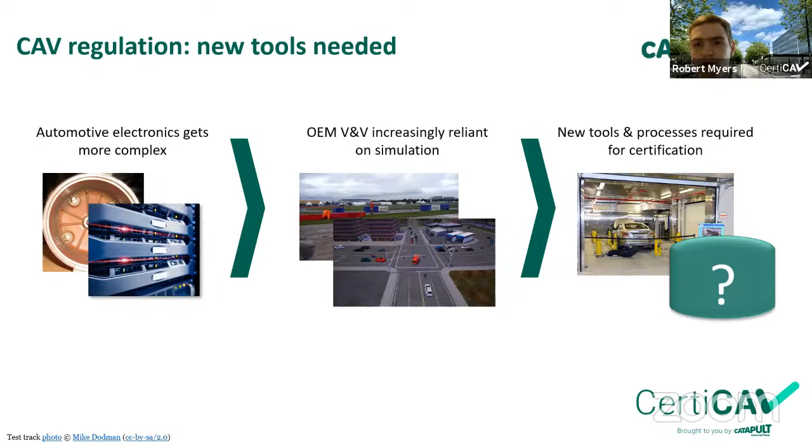And it raises the question, if we've got complex systems which are perhaps hard to verify completely at all, but certainly in physical tests, what are the new tools and processes which regulators are going to need? This is the sort of question we started on, particularly with respect to the tool side of things, when we were thinking about the MUSICC project.

So what I'd like to do is briefly introduce the MUSICC project, what it does and what the outputs were. Talk about the idea that safety is partly a compatibility problem when it comes to driving. And then, as was mentioned a minute ago, talk you through what we've done so far and the questions still to be answered on safety criteria.

One of them is the idea that a regulator probably wants to have some sort of a role in defining and specifying scenarios. They might want to curate a set of scenarios and require an OEM to test against them, for example. And that implies a need for some sort of tool to assist them with this process, which was exactly what MUSICC set out to do.

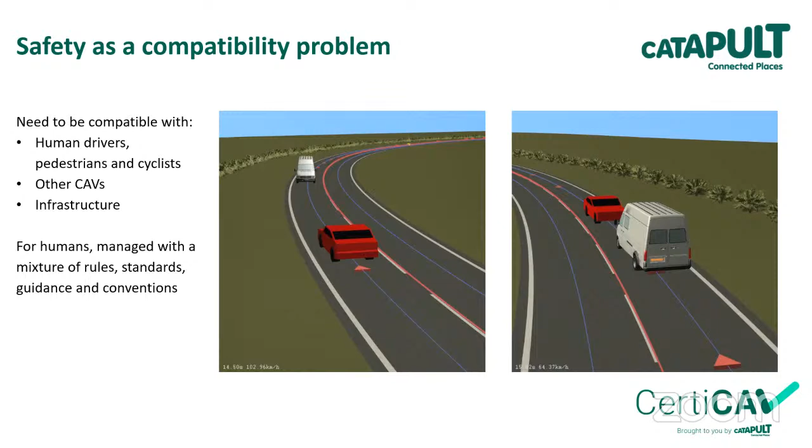That works great for robots if you can define such a set of rules, but there's also a need to handle things like human error and the interactions with other road users. So, as I say, I won't dwell on this now, but our early thoughts were that some sort of mixture of rules and more generic, more flexible measures would be needed to handle situations which came up.

When we proposed these to our advisory group, the feedback was helpful and interesting. I think it's fair to say that the majority of people agreed we were on the right sort of lines, but there were a lot of interesting questions raised, particularly about how you make these measurable and applicable. And that question of making these measurable and useful effectively is one which we've been looking at over the last few weeks. And I think that brings me to the point where it's time to hand over to Tom Webster, who'll explain a little bit more about what we've been doing in that area.

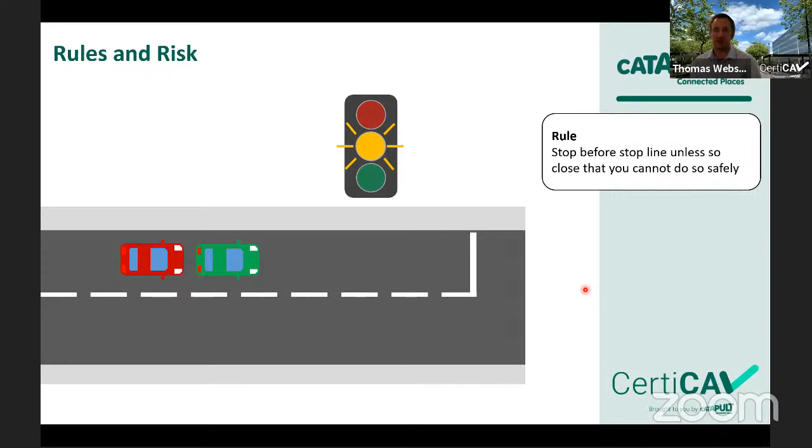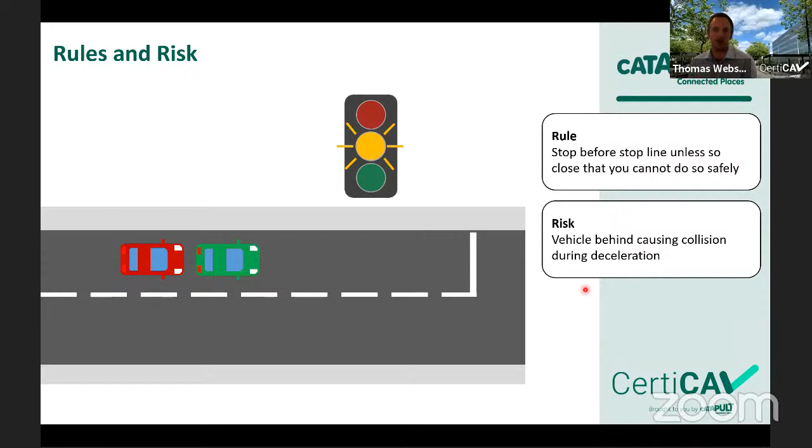So what if there's someone who's accelerating up behind you very close, doesn't appear to have any intention of slowing down? This introduces the risk that if you do start to decelerate for that stop line, you could be involved in a collision. So that changes what's reasonable in terms of interpretation of the rules. So these are the kind of challenges that there always are in relation to evaluating what's reasonable, what's safe.

Things like, what is a reasonable interpretation of traffic rules? Because they quite often have kind of what-ifs. What is a reasonable balance between following a rule because that's what you're supposed to do and risk minimization? And there is also the kind of tricky compromise of there is always a bit of a risk appetite. People will make decisions to erode safety to a small extent if it's going to have a big impact in terms of their journey or movement of traffic and so forth.

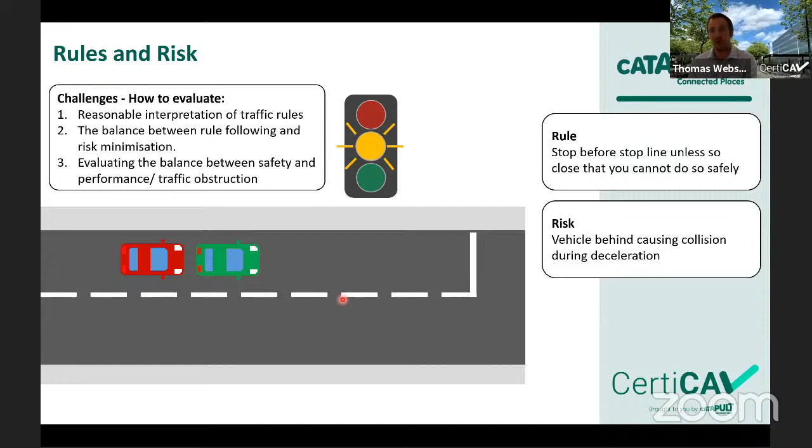So in relation to this rules and risk landscape, we had the idea of, well, you can actually map and visualize this. So if you create an axis where on your x-axis, the positive side refers to common specifications, and on the left side is proprietary on the negative. The reason this is all in grey is that that is not something that's viewed from the outside. And then on the y-axis, if your positive is following rules, and the negative is based on risk, then you can start to map out how driving is executed on that basis.

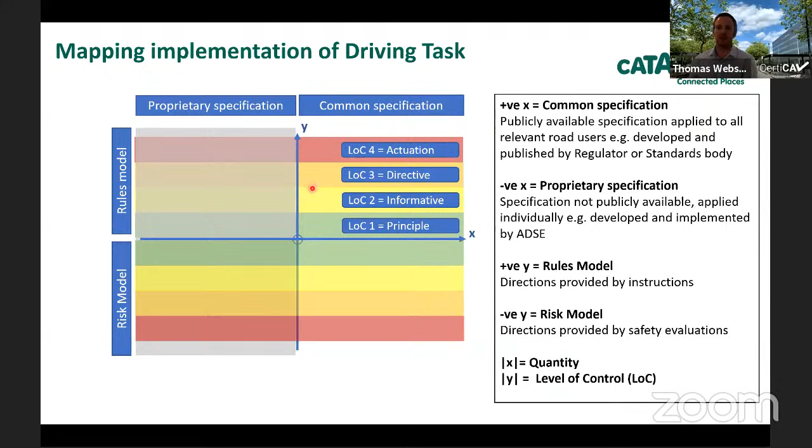And something else we can do here: if you make the magnitude of the x-axis a quantity in terms of number of instructions, you could make the y-axis level of control. So we put four arbitrary values for that. You've got principles going up through informative, directive, and actuation at the top. So in the act of driving, you need to be doing something at the top to actually actuate driving instructions. But then there's some substance below that that's helping to inform and set the structure, influencing how those actuations happen.

So subjectively, human driving might look a bit like this. There's all the fabric of the road traffic rules, which is, of course, common specification, it's public, and it's largely based on rules. But in the highway code, it is setting some high-level specification on how you actually go about managing risk. These do have some detailed instructions, but they usually have caveats, so unless it is seen by the driver as safe to do so.

So in the actual act of driving, drivers are individually determining what are reasonable decisions through real-time risk assessments as they're driving. So they're basing this on some common principles that are defined, but it's largely a self-learnt process. Something else that should be noted is that there are sort of proprietary and unofficial social conventions in place in the real world as well.

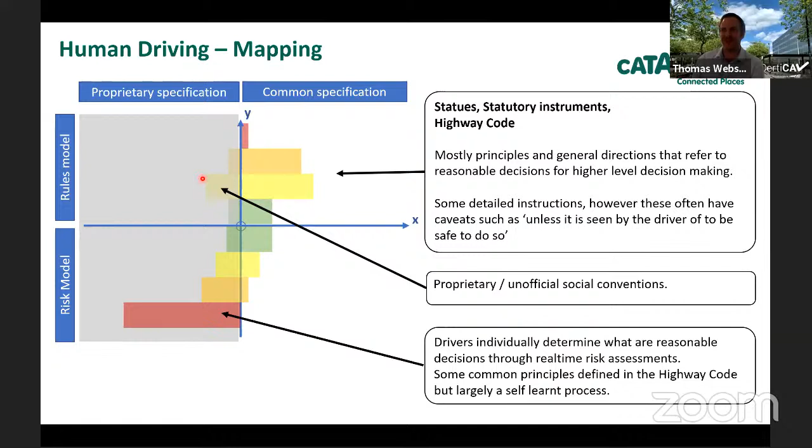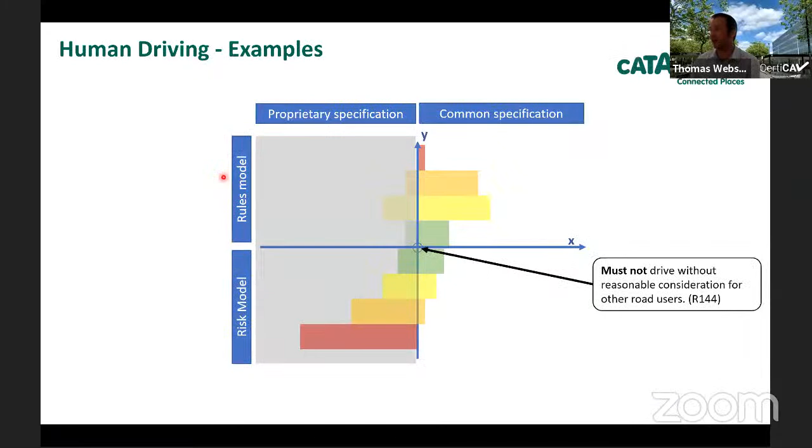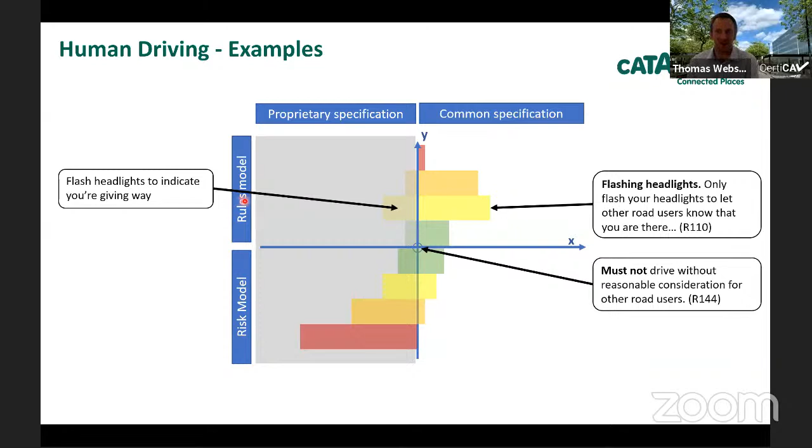So to give some examples, Rule 144, an excerpt from that is must not drive without reasonable consideration for other road users. That's a principle. Going up the scale, only flash your headlights to let other road users know that you are there. If you then go on the other side and look at proprietary, it's generally understood you flash your headlights to indicate you're giving way, which kind of conflicts with that. Going up to a more directive rule, you must obey all traffic light signals.

There's an example in the highway code informing how you go about risk. There's things on adapting your driving. But in reality, when people are actually executing their driving, they're making all these real-time decisions, and these are actually governed by this actuation, low-level risk modeling that's going on inside someone's head and that they've developed and learned over time.

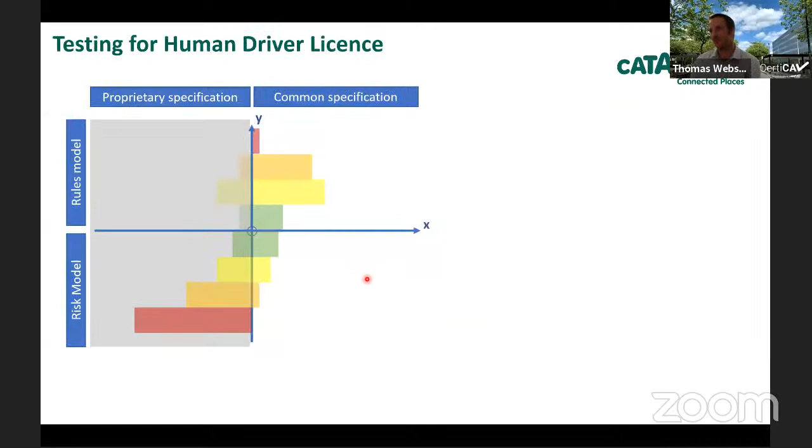So how does this then translate in terms of testing? When a human driver is tested, their comprehension of the highway code is spot checked with a theory test and so forth. And then in the driving test and the hazard perception test, the ability to execute their risk assessments is assessed. One observation: do humans have an inbuilt defeat device like VW and Mercedes? Because they're probably not going to perform the same way during tests that they do as soon as they pass their test.

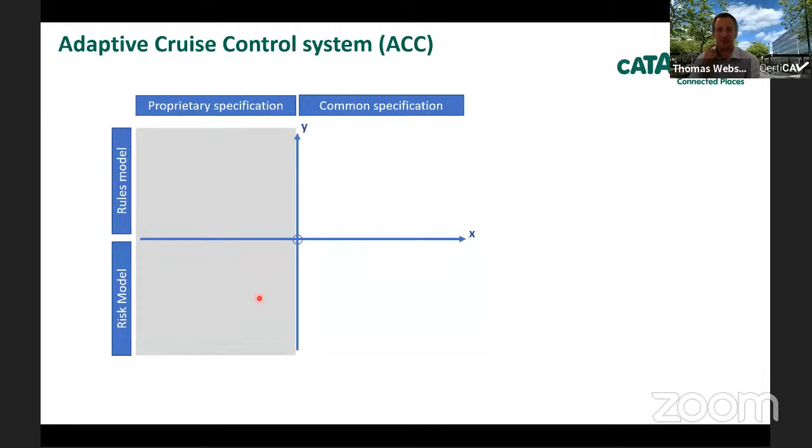This is a very limited sample of overall driving. This works because humans have a kind of common specification, and it's been proven over time that this works. And it's generally accepted that as a human, you continue to develop and learn after passing the test. But you can't take this and then apply it to an automated system, where we do not know the history, the common specification that applies to all, and so on. So if we take a simple automated system, and perhaps I should have used lane keep assist, but adaptive cruise control, quite simple. There's a specification, nice and simple.

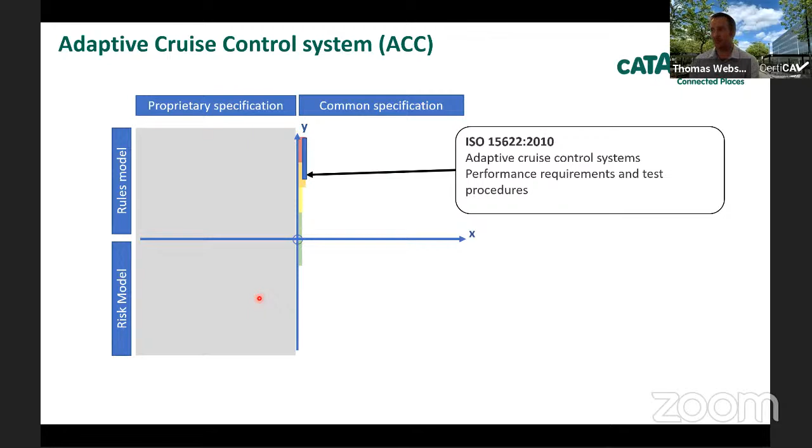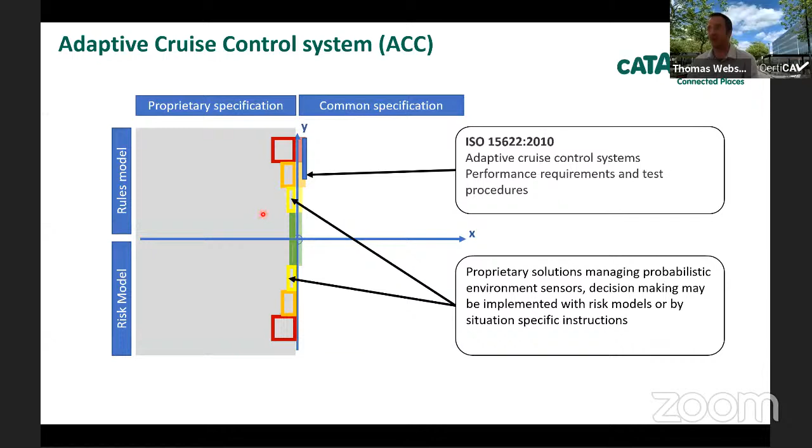But behind that specification, in terms of how that's been implemented, there is a proprietary solution. And that proprietary solution could be implemented based on risk modeling, or it could be implemented based on fine-grained specific instructions, and most likely a combination of both. And you don't know which or the other. All that's happening with adaptive cruise control is that it's passing the test.

Growing that up to high-level automated driving systems, there are proposals in UNECE setting principles there. These then reference road traffic regulations, so that references the existing fabric there. And again, when it's actually implemented, those proprietary systems could involve either risk models or rules models.

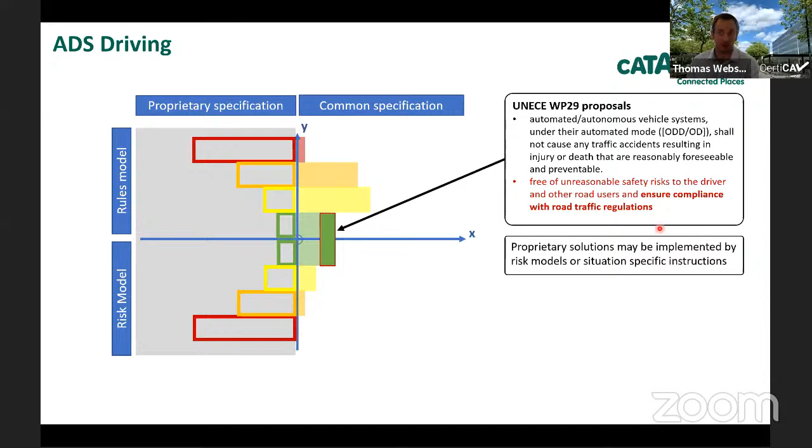So the kind of challenges involved here are that, one thing just relating to what's in red, saying to ensure compliance with road traffic regulations. You know, it's a valid principle, but some care does need to be taken that complying with driving rules doesn't forbid manoeuvring to prevent harm.

The existing traffic regulations are referenced, but those have been developed over time as a suitable tool for managing humans, and aren't necessarily applicable for automated driving systems. And they don't facilitate directly making pass-fail decisions at a scenario level.

So in terms of what options are there for generating evidence for informing evaluation decisions for ADS, the principles are there and they can be applied, but they have limited fidelity or they're not objective. So if it's an objective principle, such as don't cause a collision, then the fidelity is limited, because if you're just looking at causation of collisions, you need to look at a very large number of scenarios to get a statistically valid result.

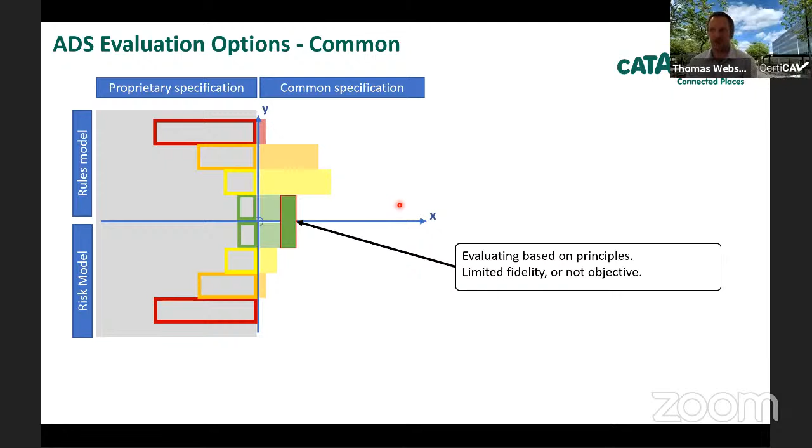Whereas if it's a more subjective principle, such as drive with due care and consideration, then your evaluation against that is somewhat subjective. It is possible to evaluate against the definitive directive road traffic rules. This does require some digitalization, so to speak, of those road traffic rules. And this may be of some use. However, because those rules relate back to reasonableness, there are limitations on what you can achieve there.

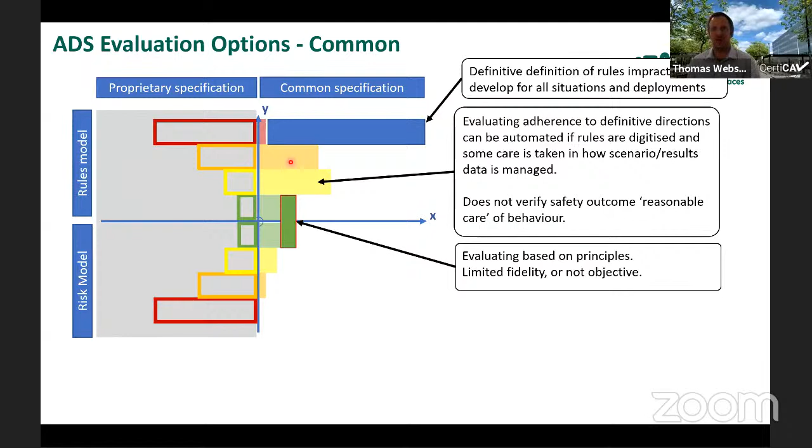If you want to grow that up and make those very fine-grained decisions, you would need to be making what some people might refer to as a full digital highway code, and really to create something that's definitive that you can apply to all deployments is, we suggest, impractical.

Likewise, you could evaluate based on risk by developing common risk models. But again, to do these at a lower level may be possible, but to do it at a high level, to make those fine-grained decisions, is very challenging.

One other observation here is that detailed evaluation requires detailed data. And this may quite often come down to things relating to driving, such as interactions between humans, interpreting poses and gestures. And this is something that's impractical to standardize, because different ADS are going to detect different things, use different perceptions to inform their decisions. And so there's a problem in standardizing that.

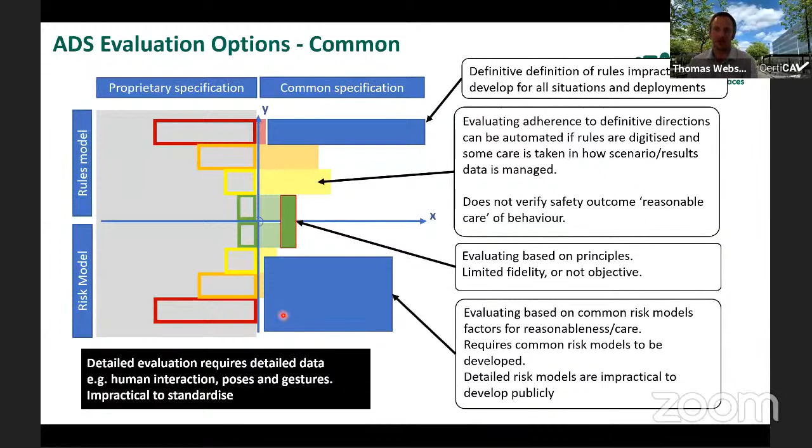Looking at the other side, on the proprietary, it's possible to evaluate based on principles. So this is similar to the common principles. When it then comes to making evaluations based on proprietary specifications, you get the challenge with IP. This is something which an ADS developer has put a tremendous amount of their value into. So sharing that raises sensitivities.

It allows you to make evaluation decisions based on scenarios, based on their own specifications. But what it doesn't help you do is actually come up with an overall validation of safety, because you've only checked that, okay, yes, it performs as per their specification, but does their specification actually provide an overall statistically safe system?

And another challenge you have is that there would be use in this in terms of you can find holes in their specification, but to systematically evaluate this is going to require a very high level of effort. And this is referencing things like the 737 MAX issue. If you've got all the lines of code, that's one thing, but actually evaluating that systematically and finding all the issues when you've got millions of lines of code is easier said than done.

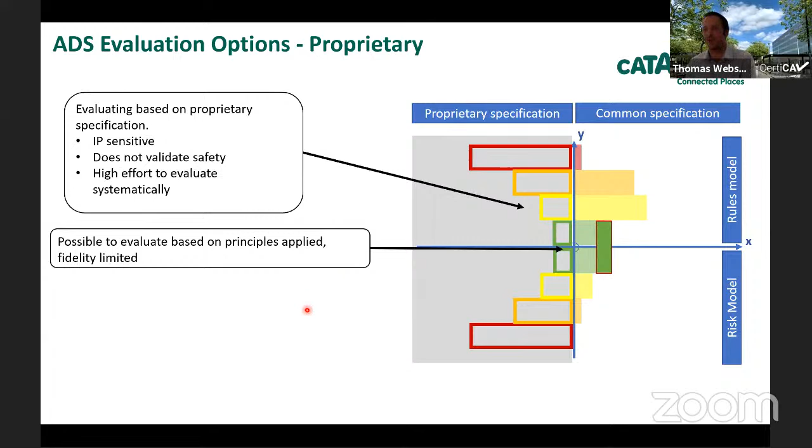Another way of tackling this could be to have the evaluation of risk that the system is generating being shared. And this may allow you to do some verification by comparing to outcome, and it resolves how, as an evaluator, you can weigh up and justify what decision is being made.

However, that verification by comparing the calculation to the outcome would still need to be done over a large number of samples to get something of statistical relevance. And by doing so, you're forcing the ADS developer to implement risk modeling rather than doing it based on instructions that they might naturally do, and also to share this, which could be sensitive.

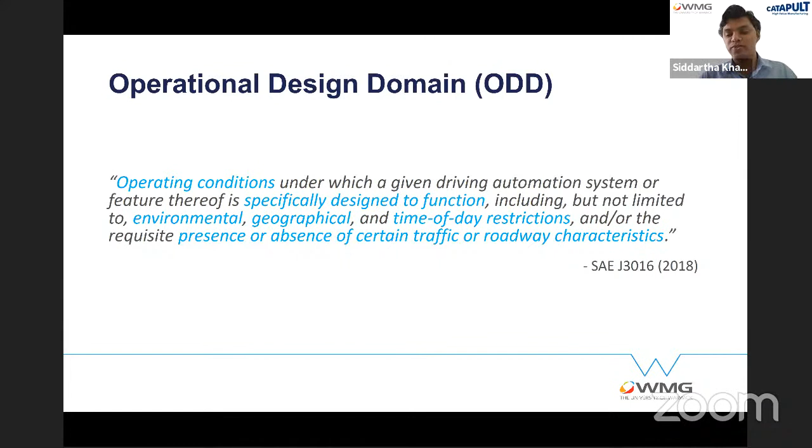So operational design domain: a lot of you on the call are fairly familiar with the term, but I'd like to highlight 2 words in the definition from the SAE J3016-2018 version. The first 2 words are the key in this definition. Operating conditions is what an operational design domain essentially is. So if anybody ever says that you've got all other kinds of attributes of an operational design domain, I would ask you to just guide them back to the first 2 words of the definition. It is essentially an operating condition, and I'll keep coming back to operating conditions whenever I talk about operational design domain.

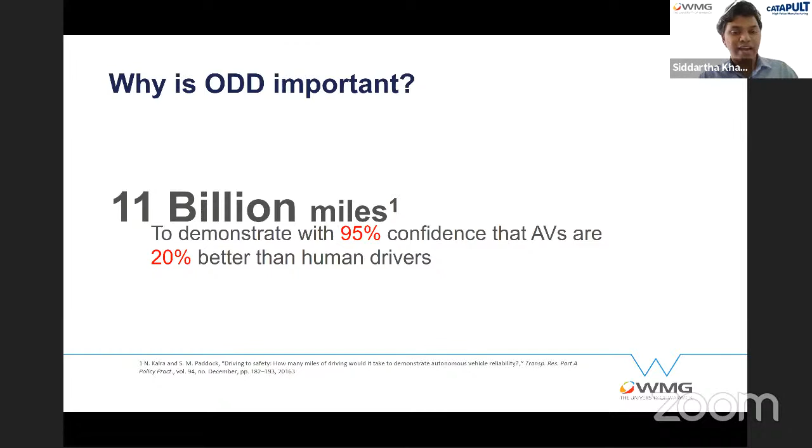So the question is, why should we be talking about ODDs, and why is it so important when it comes to scenarios? Now, there's a lot of publicity and media traction around the number of miles concept, that 11 billion miles need to be driven. Depending upon how you interpret the report from RAND Corporation, you might come up with different numbers. Some say 275 million, some say 7.5 billion. Essentially there's a lot of miles to be driven. But in the last year or so, there's been a shift from number of miles to the type of scenarios. And that's absolutely the right shift, because number of miles is by no means a right metric for safety.

But we shouldn't be stopping there, and that's where my talk is pitching. Talking about scenario-based testing is not good enough; you need to take it to the next level, because it's about the types of scenarios also. For example, deploying a CAV in central London would be very different from deploying a CAV in one of the wide streets in Arizona. The type of scenarios you're going to experience in central London are very different to what you would expect in Arizona. So just the number of scenarios is not important; it's also the type of scenarios that needs to be focused on. That's one of the reasons why ODD becomes so important, because depending upon your operating condition, your scenarios would change.

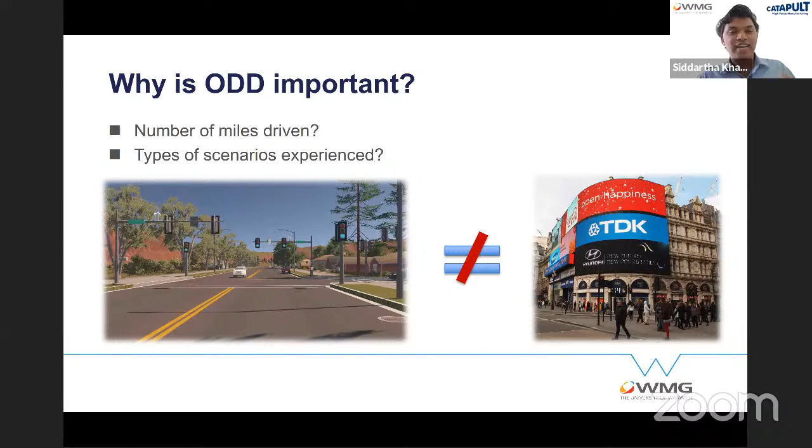And this is highlighted even more when you talk about the same system being put in two different operating conditions. So here's a system developed by Aurrigo, one of UK's flag bearers when it comes to autonomous vehicle technology. They have a low-speed shuttle that's being deployed in city centers, and you have a low-speed shuttle that's being deployed on the air side of an airport.

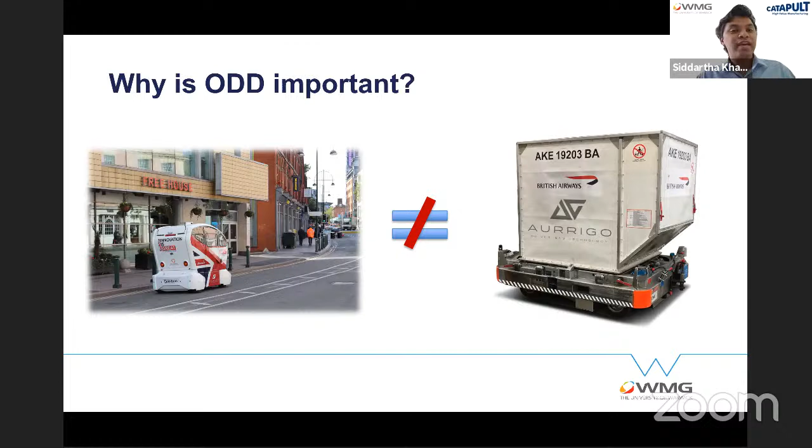Now, the technology on the two systems is almost the same, but the kind of scenarios that they're going to experience is very different. And that's actually a function, again, of the operating conditions, which essentially is the operational design domain. So that's one of the key reasons why ODD becomes so important.

So what is an ODD? Now, we've spoken a lot about why ODD is so important, and we need to now talk a bit around what is an ODD. So as part of CCAV funded work at BSI, we've been very fortunate to be one of the first nations to carry out some work around trying to answer this question of what is an ODD. So as part of BSI's PAS 1883, which is soon to be published, we've come up with a taxonomy of what are the different attributes that you would use to define your operational design domain.

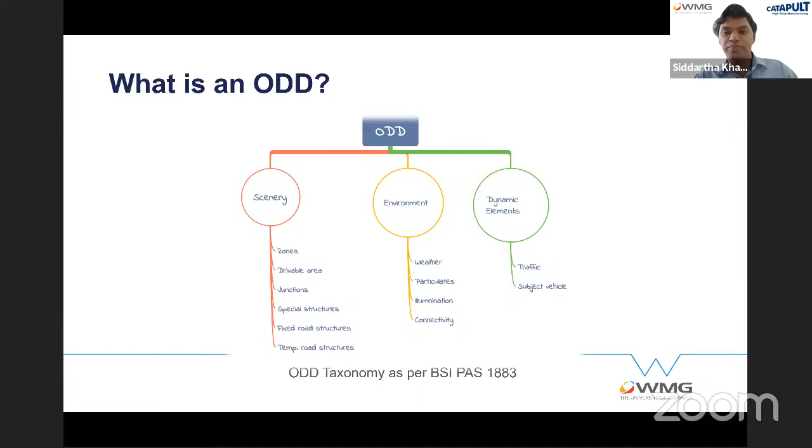Essentially, you would see that each of these attributes that you see in front of you is an operating condition of a CAV. So scenery is essentially all these geostationary objects in the operating conditions. Environment, as the name says, is more around the weather and the atmospheric conditions, and dynamic elements are all the dynamic entities that would be in your operating condition.

Now, before I go into the relationship between ODDs and scenarios and ODC, let's talk a bit around scenarios, because you can't make that link if you don't know what each of them is. So we've been quite fortunate at WMG to be part of a fantastic CCAV funded project called OmniCAV. And as part of this project, we've come up with a hybrid methodology of creating scenarios. So we have accident databases that we analyze to understand what are the causes of accidents.

We analyze real world data from insurance providers. So we are very fortunate to be partnering with Admiral, who are one of the partners on the OmniCAV consortium. And we analyzed the insurance claim records to identify what are the attributes which cause near misses and insurance claims. And thirdly, which is what I would call a knowledge-based method, we use an approach called STPA, which is essentially a hazard identification method that we use to identify potential causes of failures.

Now, the first two, you might call them a data-driven approach or database methods of scenario generation. And the third, you might say, is a knowledge-based method of scenario generation. At the end of the day, what all these three methods are doing is giving you a set of scenarios. You can have a fourth way, a fifth way, or a sixth way. Essentially, all types of scenario generation methods will give you a set of scenarios.

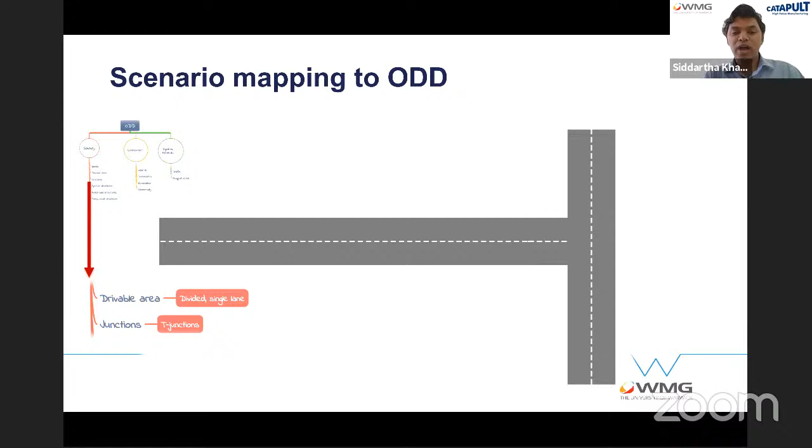So let's take this example where we've got a T-junction and a set drivable area, which is two roads, and it's single lane. If you use the PAS 1883 taxonomy to characterize what you see in front of you, you would say it's a single lane divided road or drivable area, and it's got T-junctions. These three attributes are part of your ODD definition, part of your operating condition. You could add a bit more complexity to say, I can do T-junctions, I can do single lane divided roads, I can also handle vehicles on those roads. It's not surprising, but you are explicitly saying that.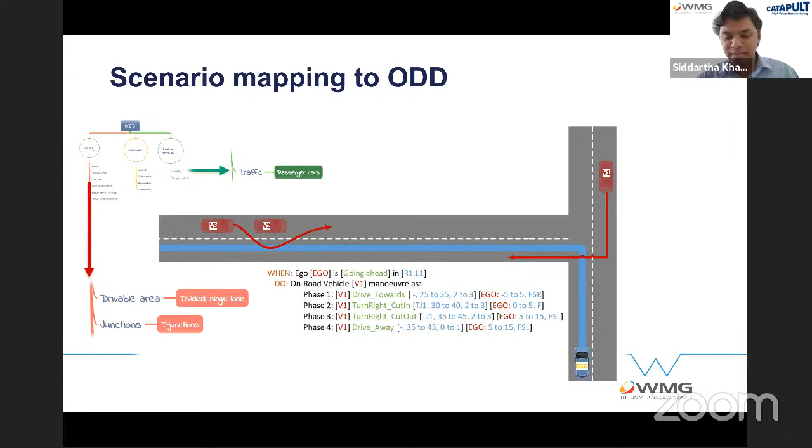So the question we have now is, we've got this confusion. Why was this confusion created? And what are we doing to remove this confusion? And that's where we've introduced this terminology called operational design conditions, ODC. ODC essentially combines 3 aspects. One is the operational design domain itself, in which we talk about the operating conditions.

The other attribute of ODC includes subject vehicle capabilities. So things like your vehicle can do an unprotected left turn on a sunny day, but it cannot do an unprotected left turn on a rainy day. Now that's actually a subject vehicle capability. It's not part of your ODD; it's actually the result of the ADS to an operating condition, this subject vehicle capability. So it's not part of the ODD, but it is an important feature that needs to be considered somewhere in this whole safety concept. So that's where ODC becomes very important.

And the third thing here is something that we keep forgetting. Now, when you talk about level 1, level 2, level 3, even sometimes level 4 systems, things like motorway chauffeur, the human driver will always be part of your complete system safety argument. You cannot just make your system safety argument considering the ODD and the ADS itself. It's also the safe use, because a concept that we keep pushing at WMG is safe deployment does not just mean safe technology. It means safe technology plus safe use of that technology. When you combine these two together, only then you will have safe deployment. So these 3 attributes together are key to a safe system definition. And that's why the concept of ODC becomes very important.

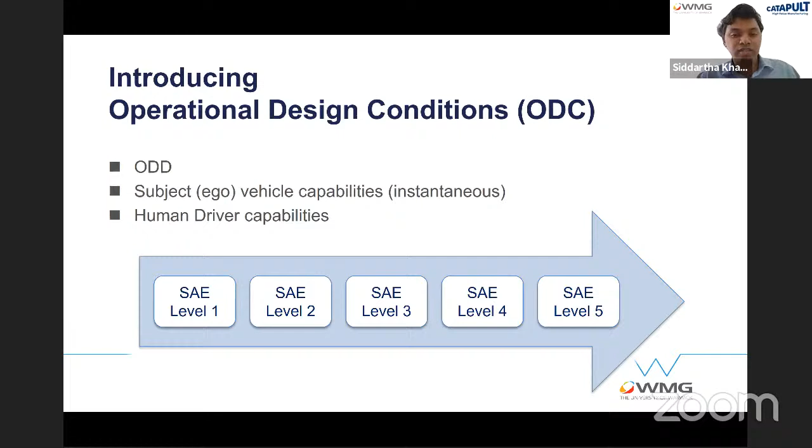ODD has been talked about a lot, and rightly so, but we need to start focusing from an ODC perspective also if we're really serious about things like ALKS and some of the other level 3 systems that are touching the higher levels of automation. So there are lots of terms I introduced, and that's one of the reasons why we need standardization, so that we all speak the same language. There's an absolute need for common understanding across this spectrum, but it's a crowded landscape. Each and every standardization body nationally and internationally wants a piece of this pie. Some of the non-traditional standardization bodies have also jumped onto the bandwagon, which is absolutely brilliant, actually, that there's so much interest in standardization. And I've listed some of them over here.

In the UK, we are quite fortunate that BSI is playing a prominent role not only nationally, but also internationally. One key thing that we need to ensure across all these activities is we should not be creating standards that conflict with each other, because that will only add to the confusion in what is already a very confused industry. So standards have a key role, but even more important, national standardization bodies like BSI and ISO at the international level have a big part in coordinating all these activities so that we ensure that it's not being duplicated, but more importantly, we are not doing contradictory things. So what I would absolutely not want is two of these organizations creating standards for the same thing which do not match each other. So I think that's one place where CertiCAV and the UK, BSI and CCAV can play a key role internationally to bring everything together.

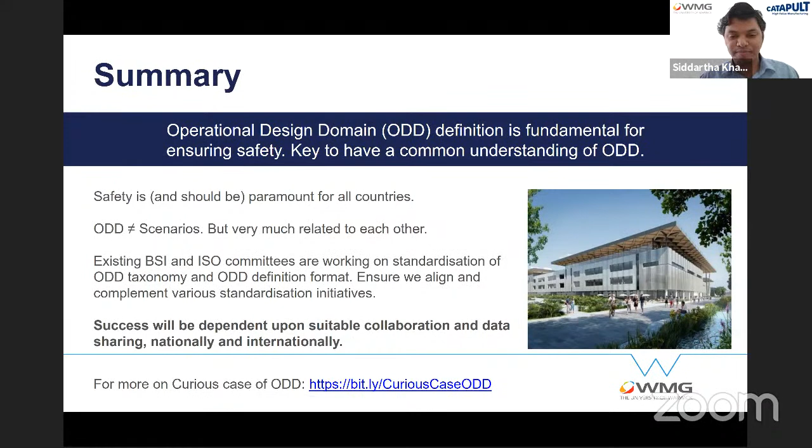Yes, thank you very much for that, Siddartha. I fully agree that we need better terms than just ODD, and thank you for your efforts in trying to clarify confusion in the community there.

Okay, so my slot is following on from Rob and Tom, who spoke about how you set the safety criteria and fundamentally how you can then assess an autonomous vehicle against that criteria. I'm going to go to the next step, which is when you look at a regulatory or local authority-based assurance process, how do you do the independent assurance of a system against the safety criteria that have been set out.

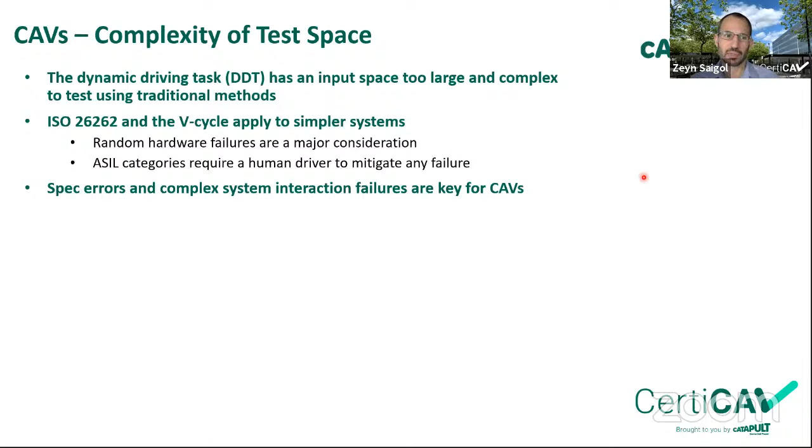And to try and give an example of how hard it is to define a spec, I've got this level crossings case. So how would you write the spec for an autonomous vehicle approaching this level crossing with the barriers down? Does your specification explicitly have to detail what to do when there's already a queue of vehicles waiting at the barrier? Does it have to say what happens if there's a lorry at the front of the queue and you can't see the whole of the barriers?

What happens if there's a car parked halfway onto the road, 3 car lengths in front of the barriers? What if it's dusk? What if it's dusk and there's a grey car at the back of the queue? What if the lights aren't working but the barriers are still down? There's an almost unlimited number of scenarios that you have to consider.

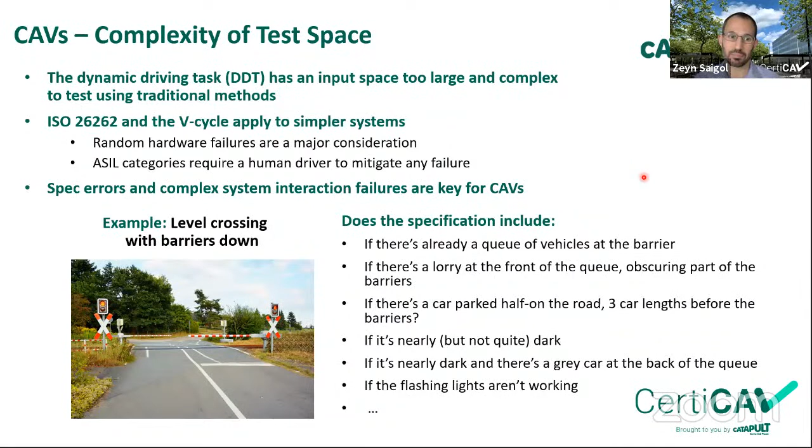So what do we need for the independent assurance part? We definitely need an audit, but I'll note that an audit is indirect evidence of how a CAV behaves. You can confirm that the ADSE has followed all the right processes, is conforming to the standards, but that's not quite the same as testing that the CAV itself behaves correctly. And that link is slightly more tenuous when you have complex software-based systems.

For more traditional hardware systems, following standards and processes is a very strong guarantee that the end products will be safe and compliant. But with the complex software systems, I think this is a much less strong link. Physical tests, however, are the gold standard. If you test a CAV on the road, that's how it's really going to behave on the road. And perhaps public roads is the best option, but there are advantages and practicalities that mean private facilities such as proving grounds will have to be used quite a lot.

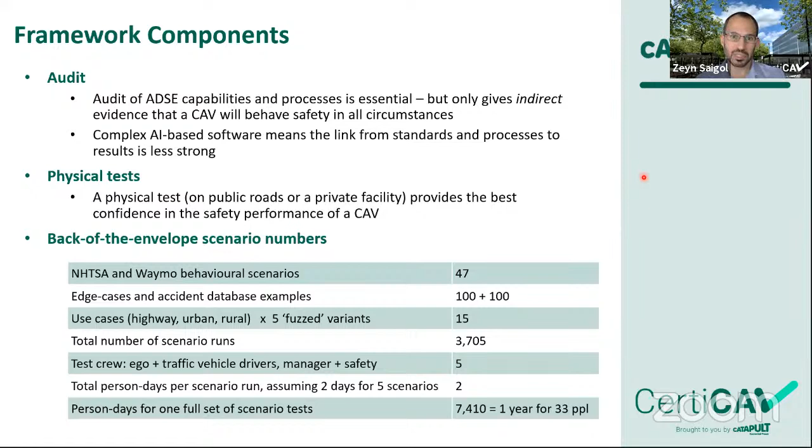Again, I'm saying that we can have a crew of about 5 people running tests and 2 days to run a total of five scenario tests. Then you get about 7,400 person days. And for comparison, the UK's certification agency, the VCA, has a staff of about 60 people working on approval. So they could test, if they used all of those staff, not quite 2 vehicles, 2 ADSs a year. And clearly those staff are already busy doing other things at the moment and aren't available just to be pulled onto ADS testing.

So this really illustrates that we can't get enough safety from physical tests. We need to do simulation tests. But if the ADSE is doing all of the simulation tests, can we audit and assure ourselves that they've been done correctly and sufficiently? And this is very hard for simulation, for several reasons, but partly because a lot of tool chains are proprietary, so you can't go to a different organization and ask them to reproduce the results.

Even if you imagine the tool chain itself is certified, it's hard to have absolute assurance that the evidence presented by the ADSE was directly generated using this tool chain. And to some extent, it's a numbers game. If you have 1 million or more scenario results, you can't audit these at the level of detail needed.

One thing that will help a lot here is verification by physical recreation of a random subset of the scenario runs. Issues here are the statistical significance is going to be quite low because you can only again test a handful of scenarios physically. And the ones that you can test physically won't cover the whole space of scenarios that need to be tested due to limited physical road layouts, what the weather happens to be, risk criteria.

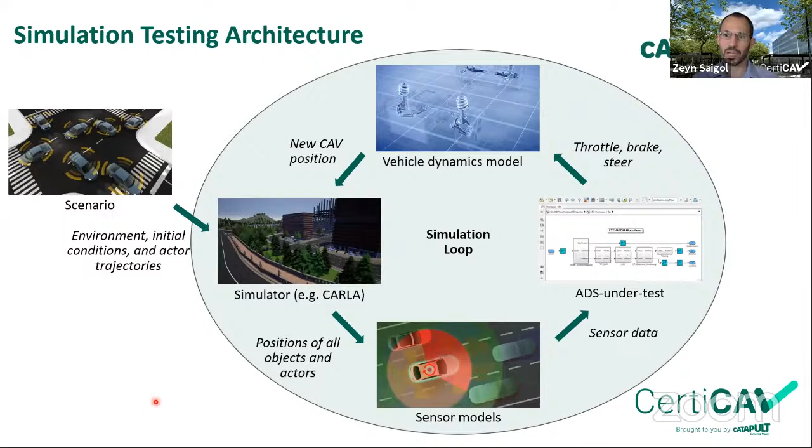The ADS is the system under test, but it also relies on the dynamics model of the vehicle to feed back updated positions into the simulator. And we feel if you standardize some of the interfaces and definitions of these 3 components, you have a very good chance of making a robust system whereby an ADS to be tested can be plugged into the rest of the system. So as I say, this requires a standard format for vehicle dynamics, which you then verify independently. Standard ADS interfaces, which OSI under ASAM is now working on.

The most complicated part of this perhaps is a standard format for perception system models. And I think it's going to be quite hard for simulation tools to simulate physics-realistic sensors in enough fidelity and transferability to be appropriate. But you can have a higher level model of a perception system that does account for line of sight, that has statistical properties that map correctly to the real world, such as the number of false positives and negatives. Again, such a model would have to be independently verified. And then finally, you need to interface to the ADS behind the sensors in order to insert the outputs of this perception system model.

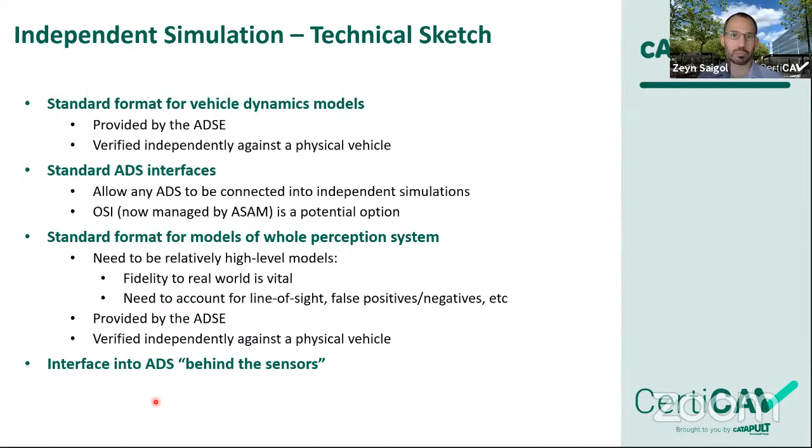So that's more of a long-term view. And then building from that, we can also define a plan for nearer-term approvals of vehicles. And having this longer-term goal in mind means that we can build our framework now, evolve it in the future, and know that it's going to be robust against these future requirements. So in this nearer-term plan, we have a core set of behavior scenarios, and you will audit the ADSE. The ADSE will run and test these scenarios in-house, but you audit those.

We'll have some validation of the simulation environment, perhaps by certification of tools, or possibly the most straightforward way to correlate against physical tests. We'll have some focused sets of physical tests. And then I think to achieve the necessary confidence in the safety of systems, we probably also need a separate test for the perception systems, which requires access to the object model of the ADS, a set of perception scenarios with, for example, perception targets, and a standardized way of carrying out those tests.

So those are our two early ideas. I should say that this is what we're going to focus on next on CertiCAV. So these are very exploratory ideas, and we are really open to feedback, and now is the time. And so hopefully in the group meetings to follow on, we'll get to hear some of your opinions.